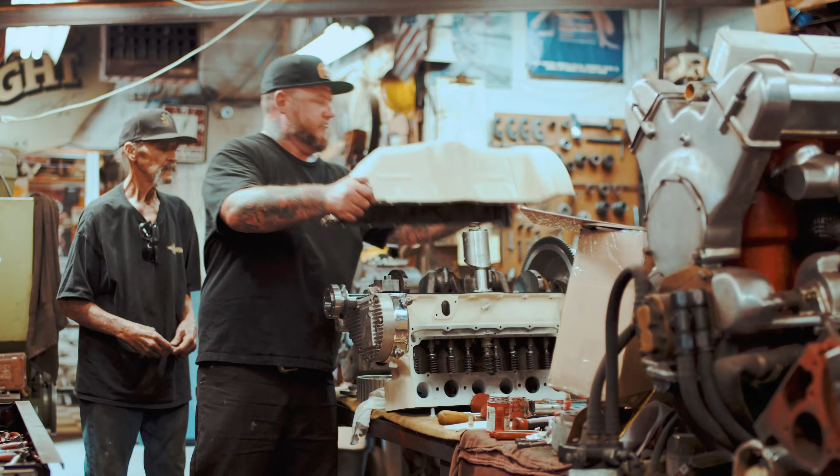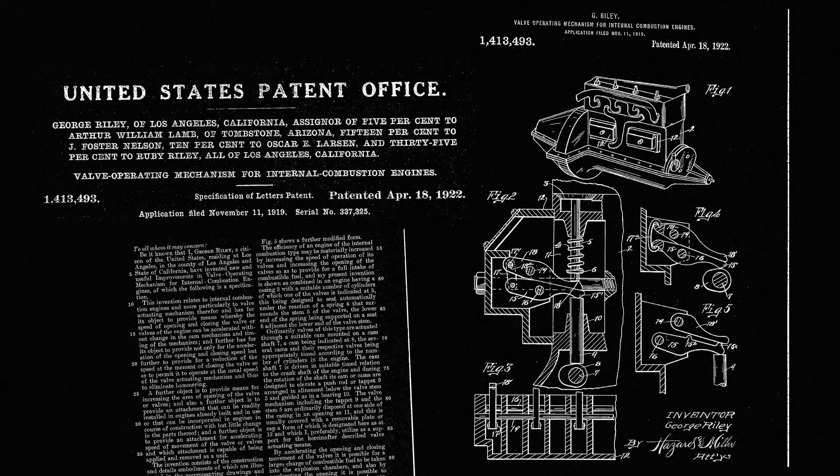Starting in the 20s, the first advertisement appeared for Riley in one of his first upgrades for the Model T engine, the Riley Multilift. The Multilift was intended to be used with a special cylinder head that had a quench-type chamber over the piston and a tall mixing chamber over the valves. This head also had dual spark plugs per cylinder. The head is noted Geo Riley Co., Multi-Ford Equipment, Los Angeles, California.

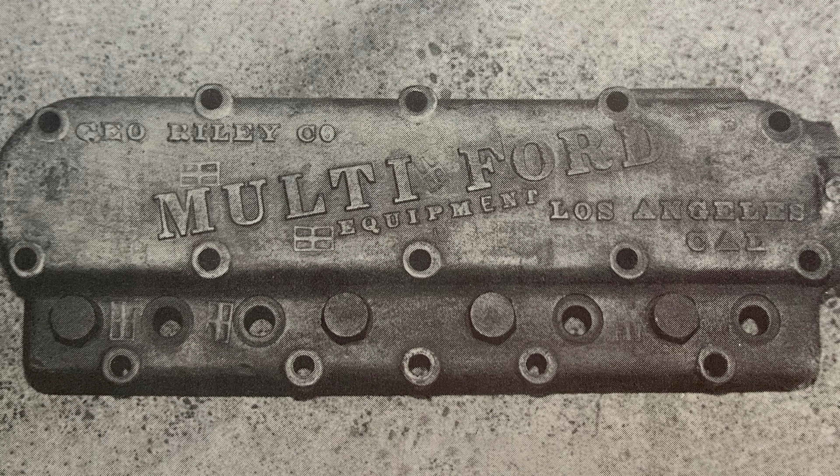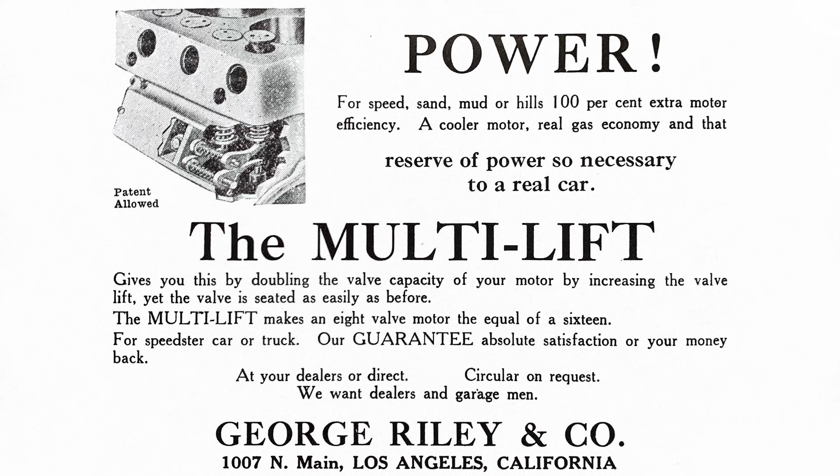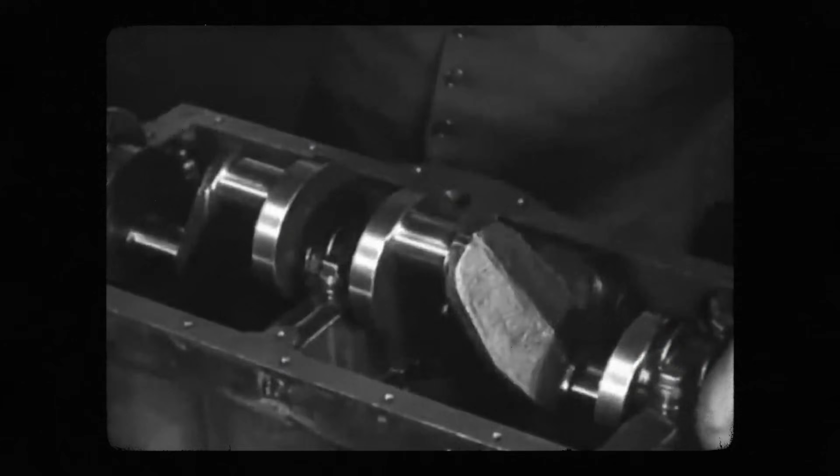A separate head was sold for racing use, with 2 bungs up top to run a water pipe similar to an Offie Type 1. An ad dating 1920 says the Multilift gives you double the valve capacity of your motor by increasing valve lift. Riley claims about a 60% increase of power, with maximum speed increasing from 40 to 60 miles per hour. By the time the Model A started to mature, the quest for speed and the industry it created was quick to boom.

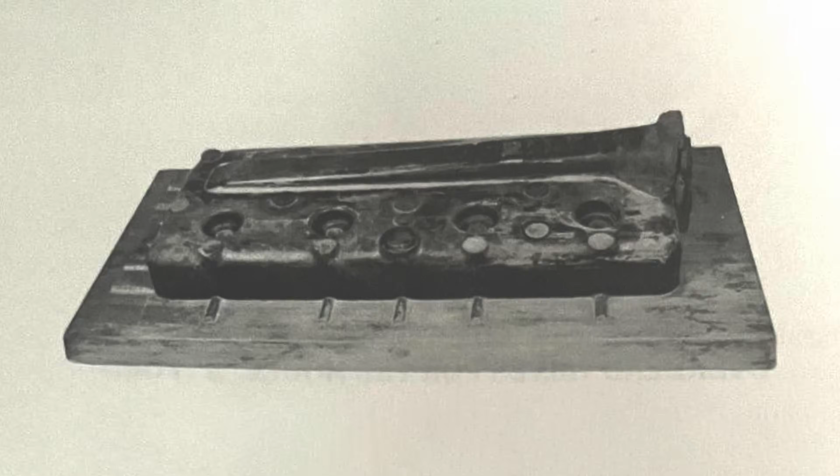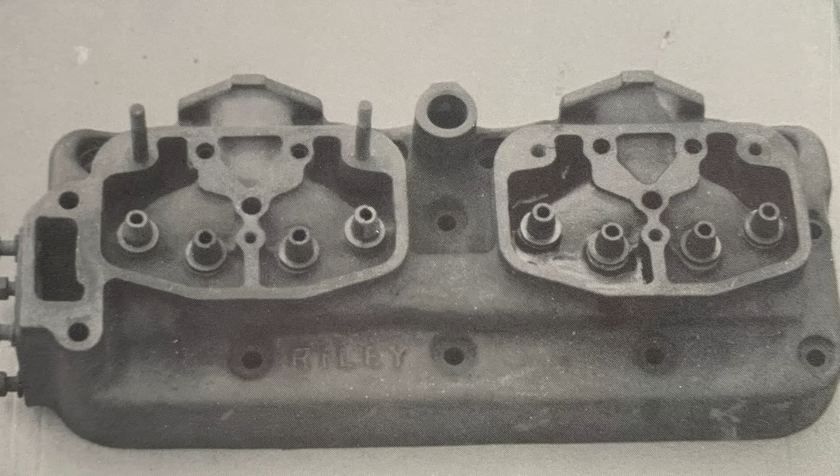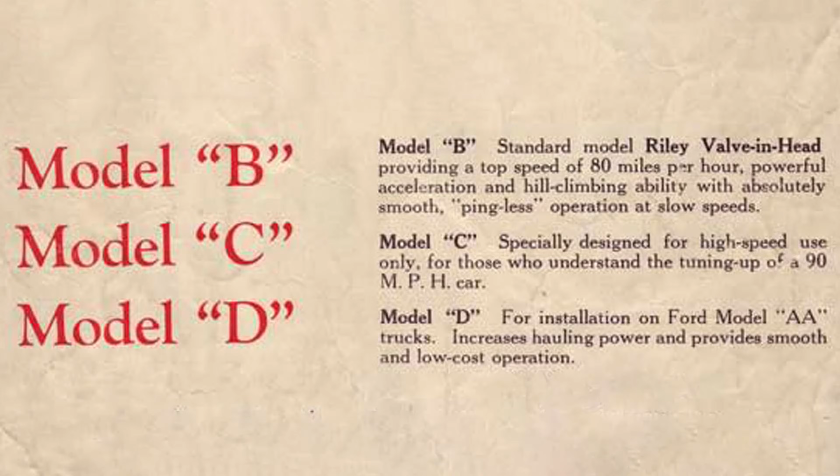George saw potential for the new engine and began drafting various heads, different from most at the time. The Riley valve-in head was offered in 3 configurations: Model B, C, and D. The Model B was an entry-level kit for those wanting more uphill power. The Model C was used only for racing. You could easily achieve 90 miles per hour if you knew the secrets of speed. The Model D was to be used on Model AA trucks. These heads increased low-end hauling power and provided smooth operation to the driver.

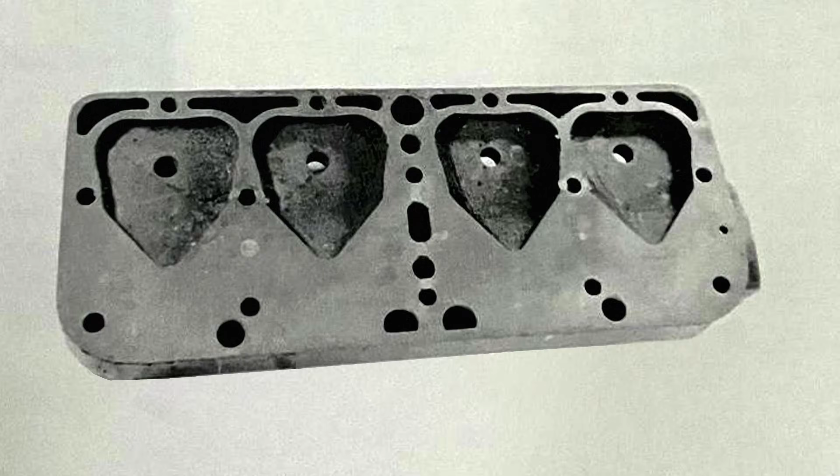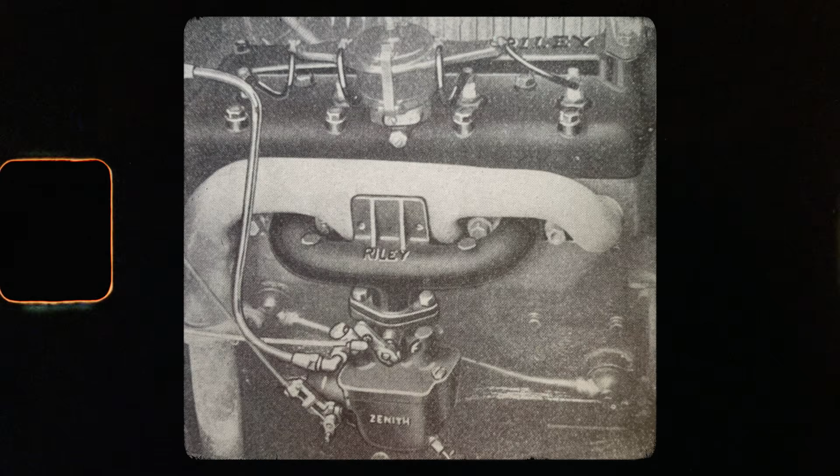Riley also made a small run of flatheads. A specific bulged compression chamber provided additional clearance around the valves, while maintaining a 5.8-to-1 compression ratio. Also noted in the same ad is a single updraft manifold, supporting a Zenith UD carburetor. Later down the road, George made a run of finned dual downdraft manifolds for the flathead, embossed with the Riley name. There were various updraft, downdraft, single carburetor, multiple carburetor; there was a plethora of intake manifolds.

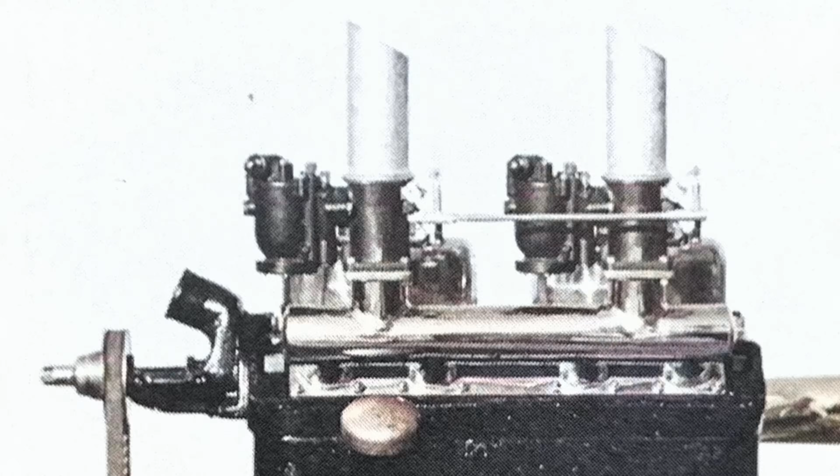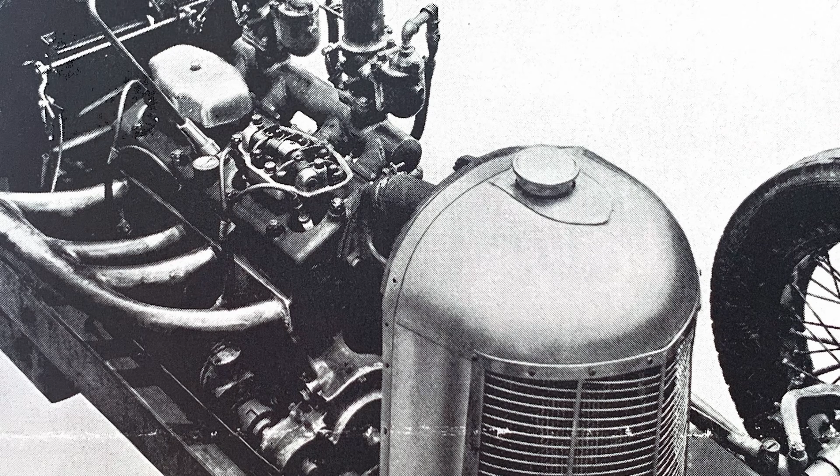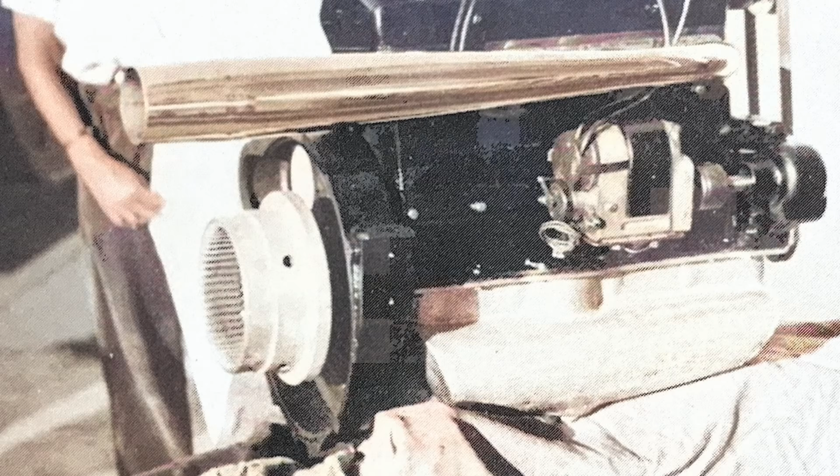My favorite is a little more on the simple side. It's a log manifold. It supports 2 Winfield carburetors. Photos show what looked to be a Model B block. Granted, this was taken 33-34, so I reckon it's most likely a cast iron head. It features a side-driven Bosch FU4 magneto, a custom front timing cover, an aluminum high-volume pan, and ironically an early 1928 multi-disc flywheel and clutch, most likely used with an in-out box of sorts.

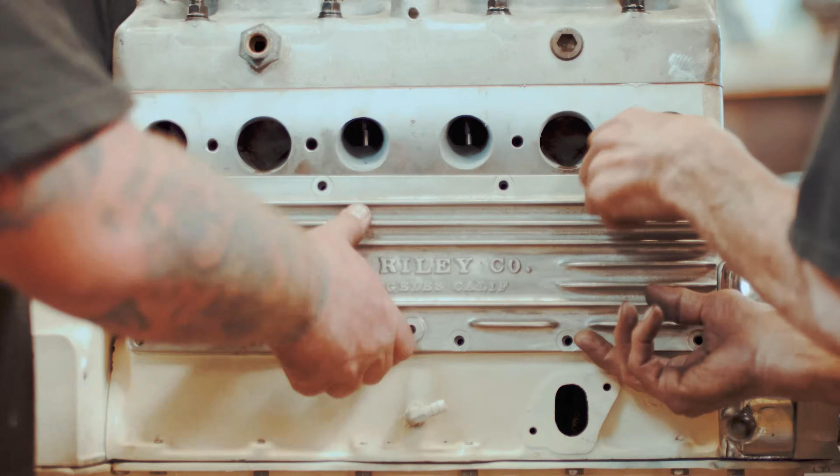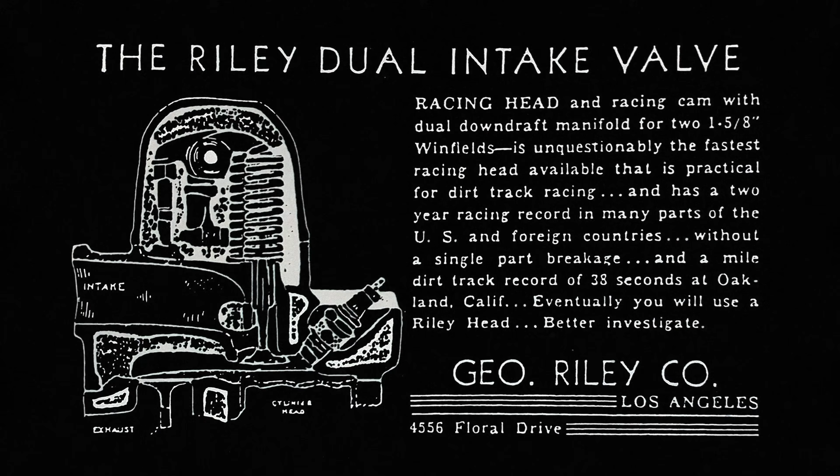Another interesting discovery is the George Riley side cover. While the original advert displays a Model A block, George made a finned Model B one. They are imprinted Geo Riley Co., Los Angeles, California. All 3 iterations of the 2-port heads are overhead intake valve F-head configurations. With each cylinder having 2 intake valves, nearly 3 square inches of valve area was achievable, making power equally at all speeds. It was noted that immediate replacement parts and service was available at pretty much any Ford dealer.

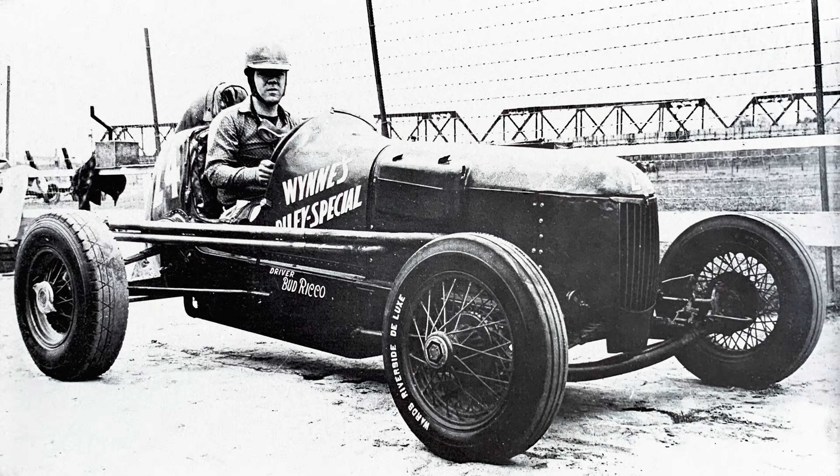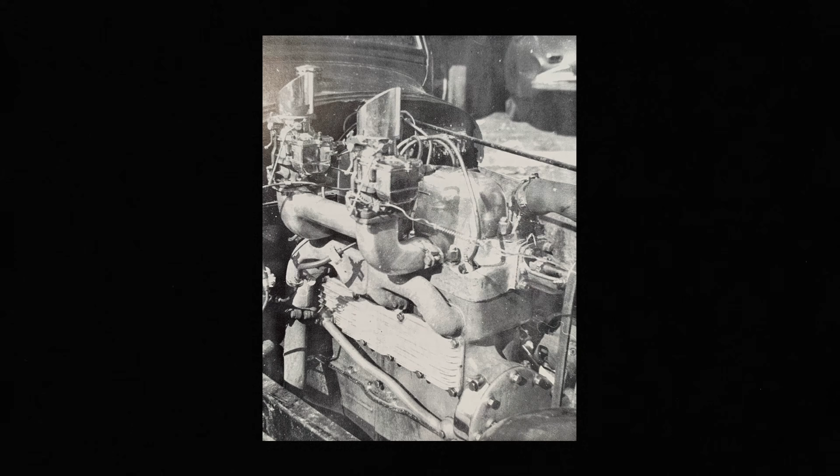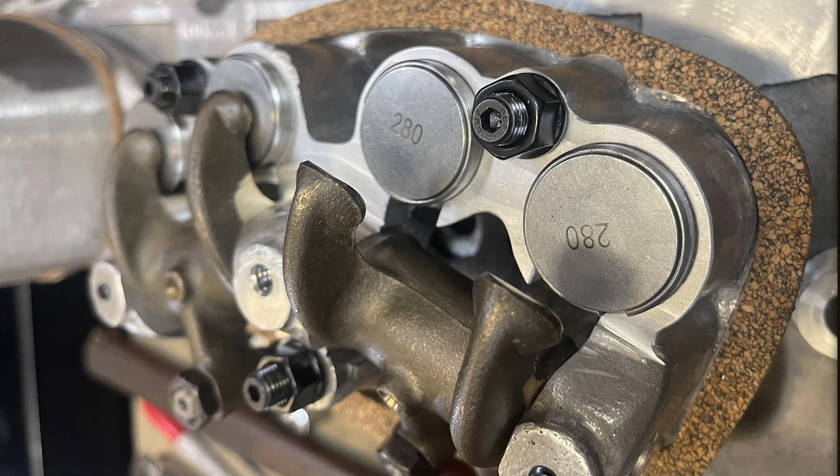All valves, springs, guides, keepers, cylinder head studs, water pump and head gaskets, even the bolt stud and nuts were standard Ford parts. It is believed that all Riley heads were cast iron before World War II, being cast out of an aluminum alloy after the war. At some point in between the transition, the 4-port was introduced. There have been a few reproductions over the years, by names such as Vesco, Yap, Frick, or Butler. Both known to have used original patterns from Riley, but Butler altered the pattern, moving one of the studs so it wouldn't go through a water jacket.

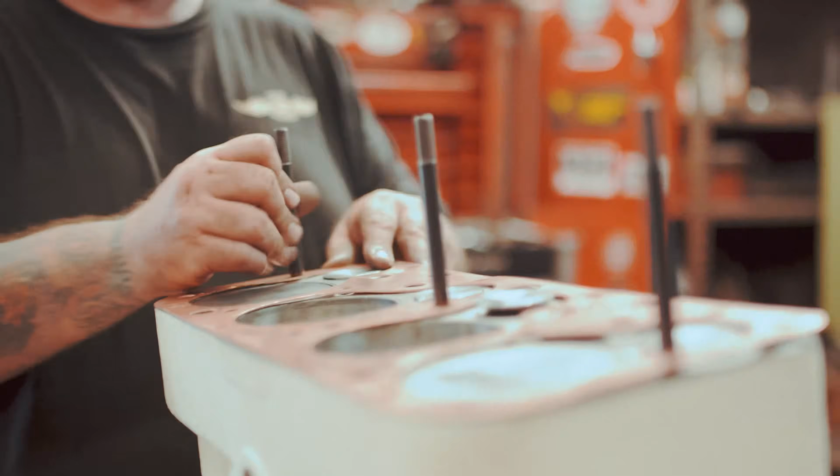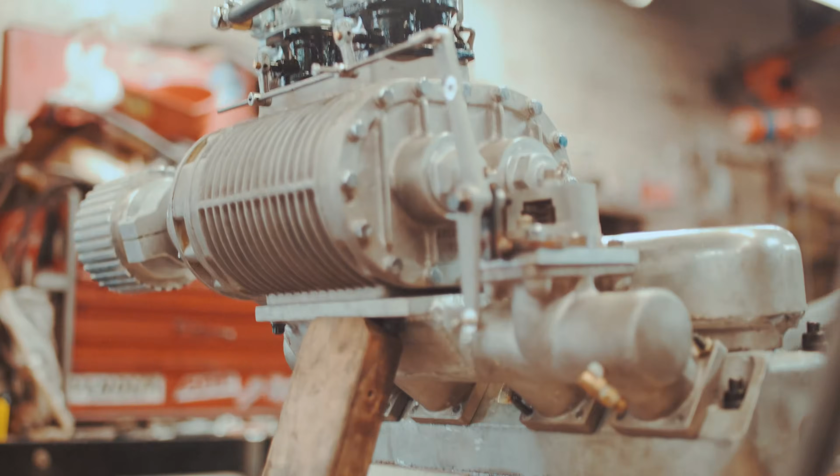Switching back to modern day and modern availability, meet Max Herman. Max runs the Banger side of H&H, a shop that's been around since 1972, with over 3 generations building engines. Not only does Max currently produce the newest and greatest Riley 4-port, he even races one. This is Max's Scott-blown Riley on a B-block. The head itself is rare, as it's an aluminum one from 1948. Besides the humongous supercharger, the B block features a C crank that's been drilled for a pressurized system, and Buick connecting rods and pistons.

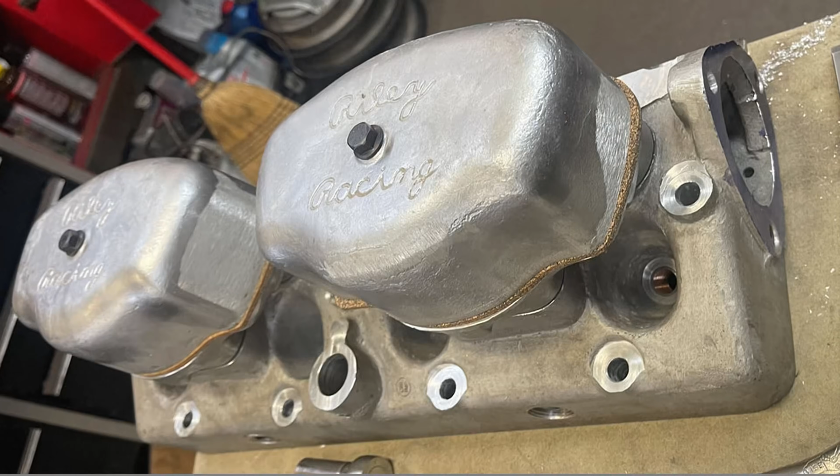Max produces the Riley 4-port cylinder head, a ready-to-go bolt-on kit for anyone looking to give their Model A or B a one-up.